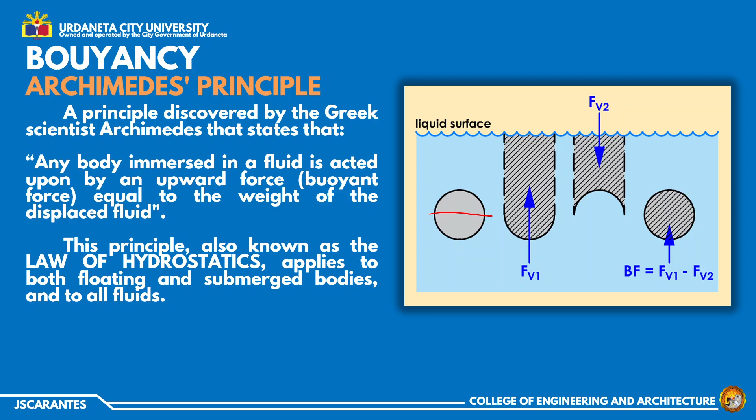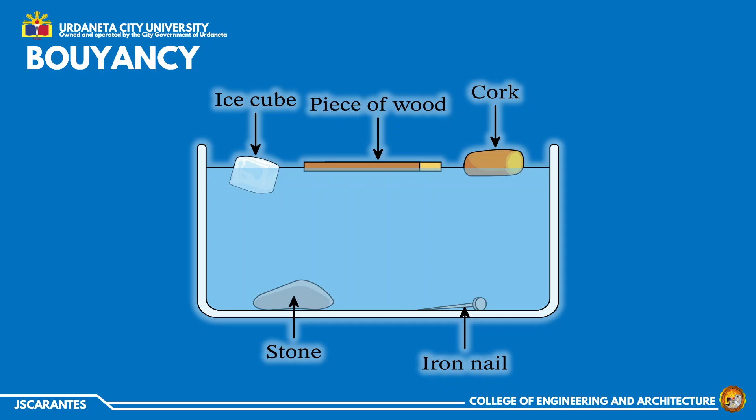So, yung reason to explain that is actually related dun sa buoyancy, specifically dun sa tinatawag nating buoyant force. According to Archimedes, any body na nakasubmerge or immerse in a fluid ay may nag-a-act na upward force na tinatawag nating buoyant force.

For example, considering an object na nakalubog or floating in a fluid or a liquid, take note, it can be liquid, can be fluid din. General lang kasi yung term na fluid since it also includes yung mga gases natin. Pag liquid lang kasi, liquid. Pero pag sinabi nating fluid, it is both the gases and liquid. So, anything that flows.

Sa isang object that is floating, let's say in the liquid na lang, since ito yung nasa figure natin, syempre yung object na yun, meron siyang weight. So, yun yung W. At sabi ni Archimedes, merong buoyant force na nag-act sa kanya if ever na that body is immersed in a fluid.

Imagine niyo na lang, for example, you have a glass of water, punong-puno yung glass. At, what will happen if you put ice on that glass? Siyempre, merong matatapong mga tubig. Yung matatapong tubig na yun, actually, yun nire-refer natin dito as volume displaced or volume of body displacing or volume of water. Basically, kung doon sa baso ng tubig, yung natapong tubig, yun yung gaano karaming nawalang tubig from the glass of water.

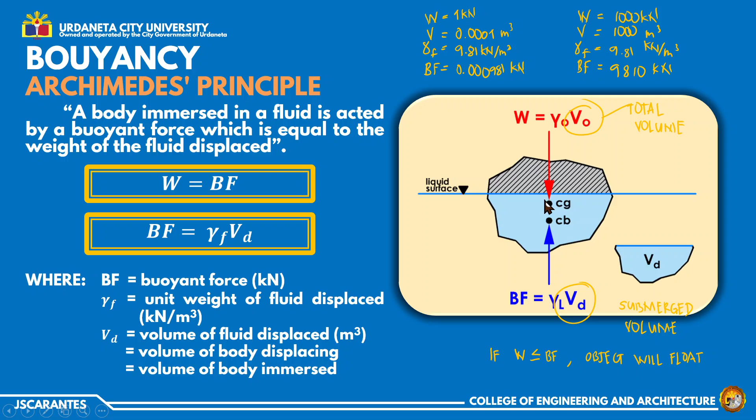So CG and CB are directly across from each other. We have additional formulas here. For a homogeneous body of volume V floating in a homogeneous fluid at rest, the volume displaced is equal to... this comes from the formula on the other side, from W equals BF. So we equate this W to BF.

So W is equal to BF. W is gamma of the object times volume of the object. The buoyant force is gamma of the fluid times volume displaced. Now, let's divide both sides by gamma of the fluid. This cancels out, leaving the volume submerged. So volume submerged equals gamma of the object times volume of the object, divided by gamma of the fluid. This is the same thing.

It's just a different version since the ratio of gamma can also be expressed in terms of the ratio of specific gravity, or if you want, in terms of density, rho of the object divided by rho of the fluid. It's just a ratio. Since rho, or gamma, is rho times g, the formula above becomes rho times g of the object divided by rho times g of the fluid. The g's are the same, referring to acceleration due to gravity, so they cancel.

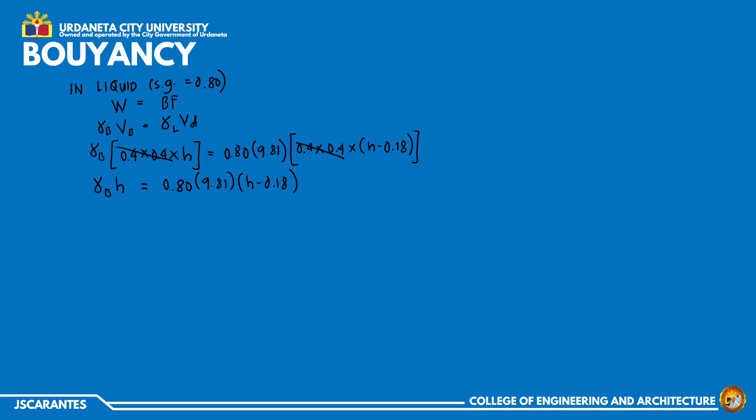Pero considering this equation, so na-produce natin, so meron tayong dalawang equation. So merong dalawang unknown, merong dalawang equation. Basically, we have two equations, two unknowns dito, no? Pero para mas madali ma-compute yung values ng mga unknowns na yon. So eto, siguro pangalanan na lang natin dito sa kabila.

So this is, say, equation 1. While this one, pangalanan natin equation 2. So kung papansinin natin yung ating dalawang equation, eto, equation siya ng gamma block times height. And actually ganun din dito sa kabila. This is gamma ng block times height. So parehas silang gamma block times height. So magkaiba lang yun din dito sa right side ng mga equations nila.

So para ma-solve natin yung isang unknown, ang pwede natin gawin is to equate equation 1 and equation 2. So bakit natin equate? Kasi parehas silang gamma b times height. So ito rin, gamma b times height.

So, gamma ng block times height is equal to... equal lang din yan. Kumbaga magkaibang expression lang. So, ito, expression doon kay water. Ito naman, expression or equation para siya kay liquid.

So, kanina, doon sa equation 1 natin, that is 9.81 times h minus 0.2. Palitan lang natin. Ang gamma ng block times height ni water, 9.81 times h minus 0.2. While para kay liquid, ang kanyang gamma b times height ay 0.8 times 9.81 times h minus 0.18. Pwede natin isolve dito si h, no? Pero para mas madali yung equation, actually, pwede na rin naman i-cancel si 9.81 kasi present yan kabilaan. So, matitira na lang, we have h minus 0.2 equal siya to 0.8 times h minus 0.18.

So, it's up to you paano nyo isosolve ito. You can use shift solve or use algebraic manipulation. Kayo nang bahala paano nyo isosolve ito, no? So, pag na-input nyo sa calc yan, so the value of h will be 0.28 meters. So, ito na yung answer natin for part A. Yan yung total height ng ating object, ng ating block.

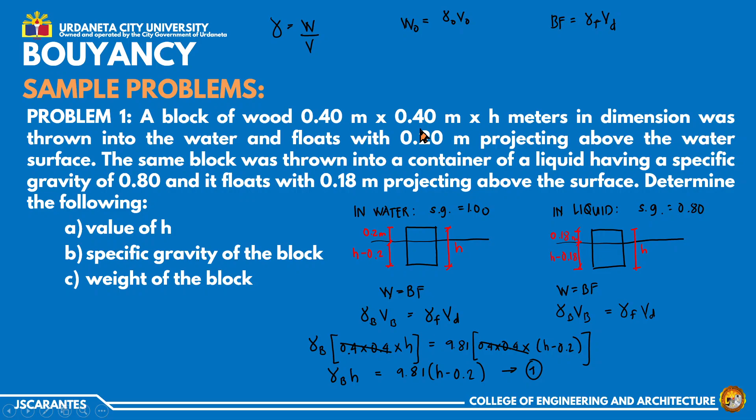So makukuha natin si weight is equal to gamma times the volume. Ang tinatanong is the weight ng block. Kung weight ng block ito, syempre gagamitin mo gamma ng block kung ano material siya gawa, and then total volume din ng block. Dito meron na tayong value ng gamma ng block, yun yung 2.803 kanina. And then si volume ng block, pwede rin natin siya makompute.

Kasi binigay naman sa problem yung cross-sectional area niya, tapos na-compute na natin yung kanyang height, which is 0.28. So ang gamma ng block is 2.803 kilonewton per cubic meter. At ang kanyang volume ay cross-sectional area niya, 0.4 meters by 0.4 meters, by na-compute nating h kanina, 0.28. So ito, unit niya ng volume, 3 meter, cubic meter. Magka-cancel na ito, ang matitira is nakakilonewtons.

So for the weight ng block, we have 2.803 times 0.4 squared times 0.28. You have 0.126 kilonewtons. So this is the answer for part C of problem number 1.

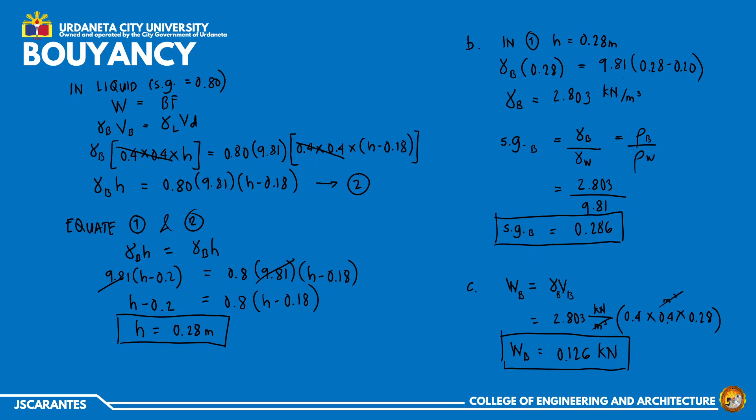I hope nasundan mo yung ating problem 1. Let's try another example. Dito naman sa problem 2, we have a block of wood, 0.2 meter thick, floating in seawater. Take note, laging babasahin saan nakalutang, hindi porket water, parehas na 9.81. Medyo madali ma-miss out kasi ito pag binanggit sa seawater, salt water, so be careful of that. The specific gravity of the wood is 0.65, at tinatanong, find the minimum area of block which will support a man weighing 80 kilograms.

Dito, parang kabaliktaran siya actually ng ating problem 1. Ang binigay kasi sa problem 1 is the cross-sectional area, tapos hinahanap yung height or yung pinaka-thickness ng block. Dito, ang binigay is yung thickness, tinatanong ano yung minimum area niya. So merong word dito na minimum.

Bakit merong minimum? Kasi dun sa block of wood na yun, sabihin natin 0.20 thick, parang siguro tabla, parang ganun yung dating niya. Merong sasakay kasing man doon weighing 80 kilograms, so syempre pag may sumakay, possible lumubog yung pinaka-block mo. So merong minimum na word dito kasi although it is not completely stated dito sa problem na to, pero pag mga ganito, minsan nire-refer din siya as in equilibrium.

Ang pinaka-figure natin, i-drawing ko na lang. For example, ito yung ating seawater surface, and then merong block of wood, say ganyan. At ang kanyang thickness daw ay, itong thickness niya, 0.2 meters. So originally, ganito sana yung itsura ng block natin.

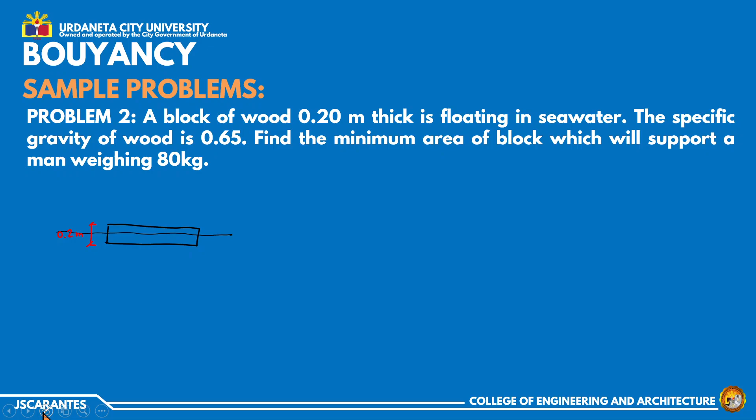Wait lang, medyo tagilid, ayusin ko lang konti. Mas lalo namang tagilid. Mahirap talaga maging straight dito kasi sa pen tab.

For example, ganyan. So originally, nung lumulutang pa lang yung block of wood, syempre merong part na nakasubmerge, merong part na nakaproject above the seawater surface. Dito, alam natin na nag-float siya kasi ang pwede natin gamitin pang check dyan. Tignan nyo yung specific gravity ng wood, 0.65 lang. Ano ba kasi yung specific gravity ng seawater? Di ba that is 1.03.

Sabi natin, one reason bakit lumulutang yung mga objects is dahil sa density nila. Kung mas malaki yung density, o mas maliit yung density ng object kaysa dun sa liquid, lulutang yung object natin. So for this case, 0.65 is less than the 1.03 na kay seawater, kaya lulutang at lulutang yung ating block of wood. Dito, sample natin, parang ganito yung itsura niya: merong part na nakasubmerge, merong part na nakaproject above the seawater surface.

Ngayon, ang mangyayari daw, merong sasakay na man weighing 80 kilograms. Pagsakay niya, let's say dito na lang sa baba. Hindi kasi binanggit yan sa problem, pero ang mga term na ginagamit pag mga ganitong klase, 'in equilibrium'. So when we say in equilibrium, ganito yung itsura niya, let's say merong stickman dito, hindi nakapatong, tagilid yung ulo niya.

Dalawa lang kasi yung meron dito sa ating object. Syempre, kapag in-equilibrium siya, kumbaga walang other external force, so weight tapos buoyant force lang ang nag-act sa kanya. Dalawa lang, yung isa downward - si weight kasi lagi naman yung downward. At si buoyant force, lagi rin siyang upward. Sila lang basically sa summation ng vertical forces. Upward is equals to downward, kaya W is equals to BF.

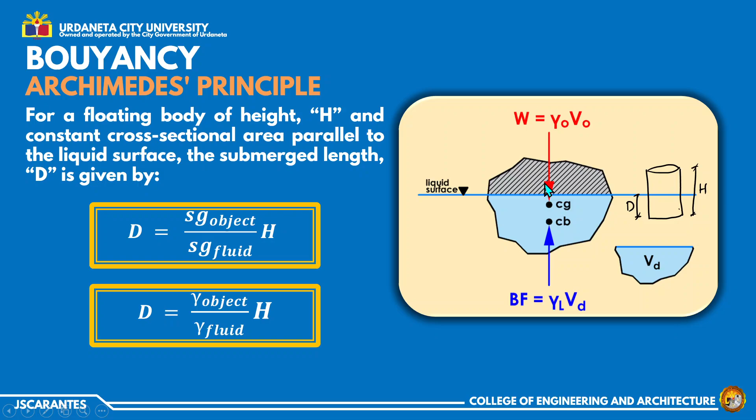Dito, ibig sabihin, yung W is equals to BF, pwede kasing dalawa yung weight na nag-act, pwede ring dalawa yung buoyant force. For example, dalawang object yung nakasubmerge, something like that. Etong W is equals to BF, para lang din siyang summation ng vertical forces - kumbaga eto yung lahat ng downward, eto naman yung lahat ng upward.

Meaning, merong mga cases na, dalawa yung weight, possible, or tatlo, o apat. Ganun din sa buoyant force, pwede rin siyang 2, 3, or 4. Depende dun sa ating problem. Pero kung i-analyze natin dito sa ating problem 2, ano ba yung mga weight na meron dun sa ating problem? Originally, syempre, merong weight yung block.

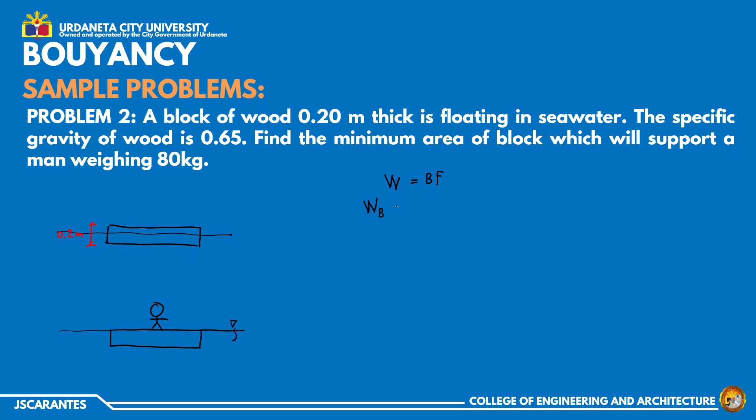Binidicate naman dyan, nagbigay ng mass, naka-kilogram, so mass pa lang yan. Pag merong mass, meron ding weight syempre. So considering the weight, dalawa yung present dito ngayon - merong weight si block, meron ding weight si man. So W sub M na lang.

Pero pagdating sa buoyant force, meron din bang buoyant force si man? Wala, kasi nakasakay siya dun sa block. Ang nakasubmerge lang is yung pinaka-block of wood natin. So ang meron lang buoyant force, si block - walang buoyant force si man kasi si man nakasakay sa block. Yun yung critical dito na kasi hindi completely stated sa problem, pero yun yung maging solution natin dito.

Ngayon, expand lang natin to mga to. Si gamma ng, or si weight ng block - take note, weight is equal to gamma times volume. Magsawa kayo sa formula na yun, yun talaga yung ginagamit dito. So weight is gamma - weight ng block, we have gamma ng block, volume ng block.

Pero dito sa weight ng man, hindi nyo na kailangan gamitin si gamma times volume kasi nagbigay na ng mass. So to convert mass to weight, ang formula natin for W is equal lang kay M times acceleration due to gravity. And then kay buoyant force, that is lagi naman itong gamma ng fluid times volume submerged.

Dito, papansin na, sabi natin completely submerged, kumbaga yung pinaka-top ng block is flush dun sa liquid surface natin. Ibig sabihin, completely submerged meaning yung ating volume ng block equal siya dun sa submerged volume. So eto, pwede nating palitan na lang din as volume ng block kasi completely submerged - equal si displaced volume kay total volume.

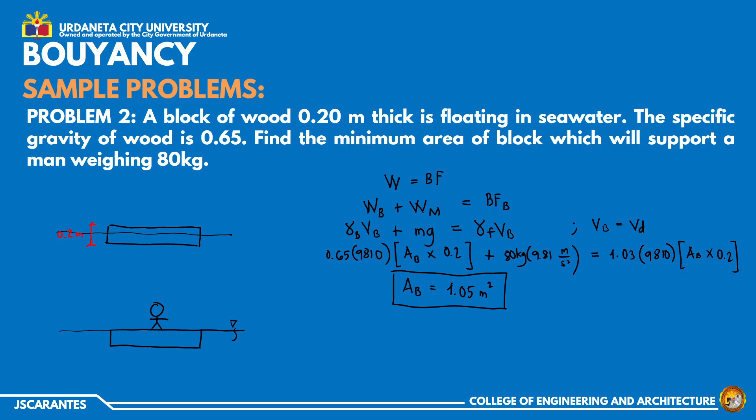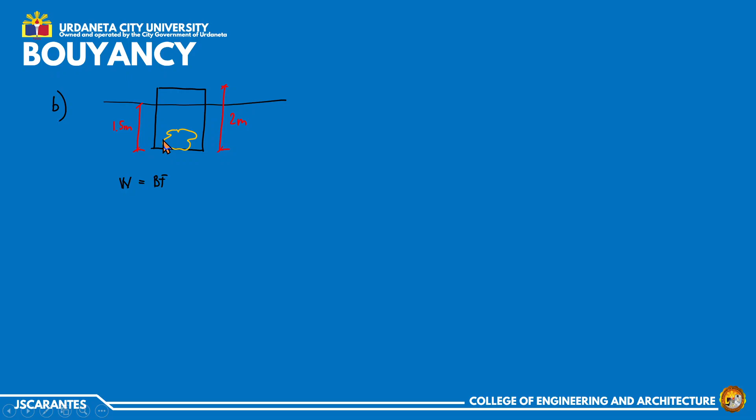So, summation pa rin tayo ng vertical forces sa lahat ng weight, equate mo sa lahat ng buoyant force. Dito, ang weight na meron is still the weight ng cylinder tapos weight ng lead. Ito yung binigay plus hanapin natin weight ng lead. Ang pinagkaiba lang sa solution natin sa part A, isa na lang kasi yung buoyant force na present dito - buoyant force na lang ni cylinder. Kasi nilagay mo sa loob si lead eh, kaya wala nang dinidisplace ng water si lead. Ang meron na lang is si cylinder. I hope na gets yun.

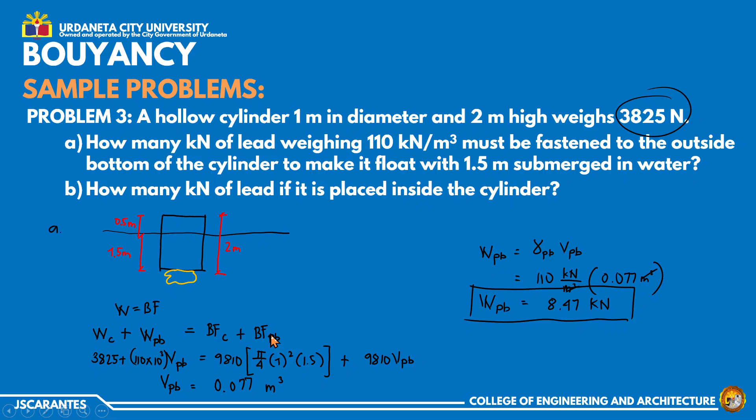So, pinaka-solution natin, parang ito rin siya. Tatanggalin nyo lang itong pangalawang term natin kay buoyant force kanina, and everything is the same na. So, this is 3825 plus 110 times 10 raised to 3 para maging newtons.

Multiply natin volume ni lead. Equate natin, buoyant force cylinder, we have 9810, 9810 volume submerged ni cylinder, pi over 4, times 1 squared times submerged depth na 1.5. So, tinanggal lang natin yung plus dito kanina.

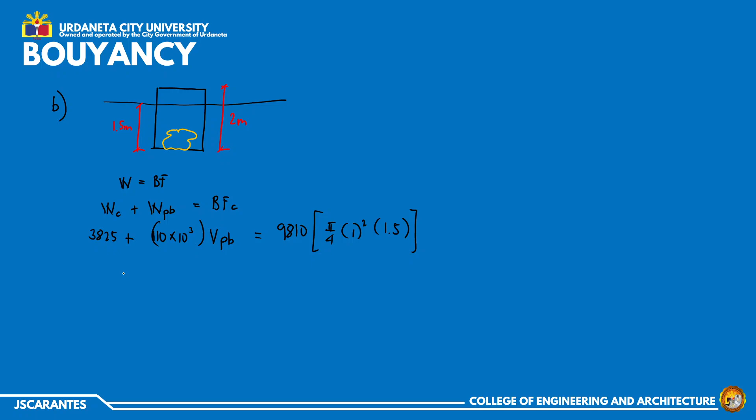So, to solve this, we have volume ng lead equal to... nabakwata yung sa calculator ko, kailangan kong i-type ulit. (9810) pi over 4 times 1 squared times 1.5. Shift solve. So, we have 0... or kahit hindi na pala, i-shift solve, pwede palang rekta. Pero ito ang volume nito, para lang same yung solution natin, 0.070

cubic meter. And then, for the weight ng lead, equal ito kay gamma niya. So, ang gamma niya is 110 times 10 raised to 3 times 0.070. Pero pwede rin pala na ito, ito na mismo yung hinahanap kasi na naka-kilonewtons.

Pero ang gawin nyo na lang, i-convert nyo ng kilonewton. So, gawin nyo 3.825, ito naman gawin nyo 9.81. Or pwede rin ganyan mismo, 110 times 10 raised to 3 yung gamitin. I-multiply natin ito - so 110 times, or wait lang, naka-kilonewton pala. Tanggalin natin itong si 100 or times 10 raised to 3. So, 110 lang times 0.070 kasi naka-kilonewton yung hinahanap.

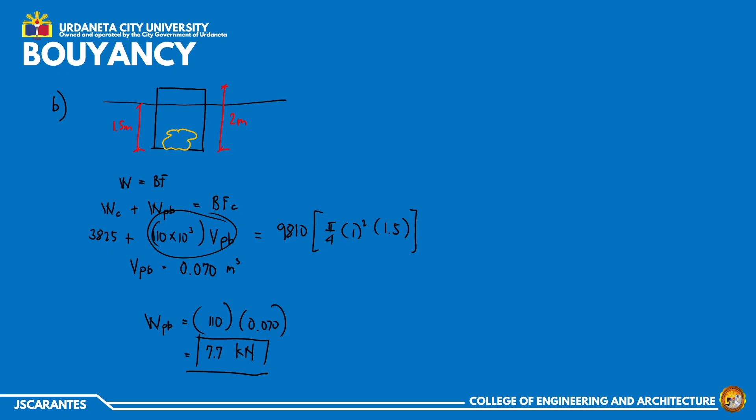So, yun yung ating problem number 3. For problem number 4 naman, we have two spheres, each 1.2 meter in diameter, are connected by means of a short rope. One weighing 4 kilonewton, the other weighs 12 kilonewton when placed in water. Tinatanong tension in the rope, volume of the spheres exposed above the water surface, and then the height of the segment above the water surface.

So, dito, kumbaga, kailangan kasi nating, hindi naman assume, kailangan nating i-check. So, merong dalawang sphere daw - hindi naman natin alam, initially, kung yung dalawang sphere ba na yan, lulubog parehas, lulutang parehas, or lulubog yung isa, lulutang yung isa. Para ma-check natin paano yung magiging drawing sa figure, kailangan nating i-determine if ever na alin man sa dalawang ito ang lulubog or kung parehas man silang lulubog. So, something like that.

And to do that, parang yung ginawa natin kanina, so we need to compute for the, or compare natin si weight and then the possible buoyant force na pwede nilang i-produce. For example, considering the sphere na merong weight na 4 kilonewtons, then dito naman, considering the weight na 12 kilonewtons. Ang buoyant force nila na mapoproduce, kung isasubmerge mo sila completely, ay parehas lang kasi magkaparehas sila ng size. Ang magkaiba lang is yung weight nila, so possible siguro maggawa sa magkaibang material - yung isang material mas dense, yung isa mas magaan. So ganon, kaya magkaiba yung kanilang weight.

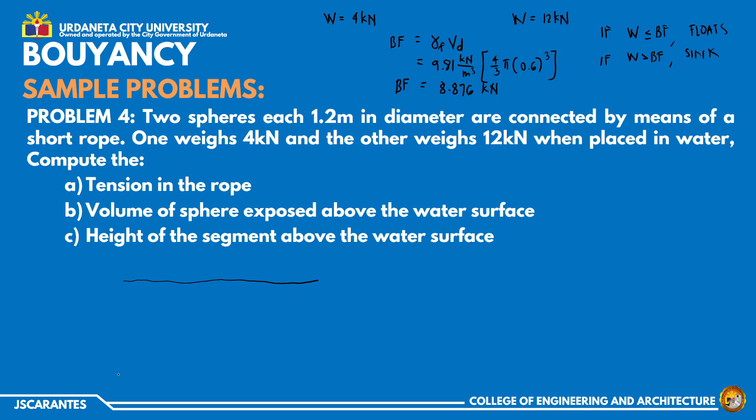So pwede na tayong mag-drawing ng figure ngayon. Itong figure na to, hindi lang basta in-assume, na yung isa. Napakita naman natin dyan na based on sa comparison ng weight and buoyant force, yung isa talaga ay lulubog, yung isa is lulutang. Yung lulutang na yon, yung 4 kilonewton. Balik tayo dito. Ang buoyant force na ma-produce niya, 8.876. Etong buoyant force na to na 8.876, ito yung mapuproduce kapag sinubmerge natin completely.

Pero ang kailangan mo lang kasi para mabalance siya, just to float, just to make an object float, dapat lang sakto-sakto yung weight dapat equal to buoyant force. Pero dito sobra-sobra yung buoyant force. Meaning, hindi natin kailangan gamitin yung total volume niya. Hindi natin kailangan i-completely submerge para ma-support siya. So as long as equal yung value ng buoyant force and weight, pwede na siyang mag-float.

Ibig sabihin, so parang bottom line lang doon, sobrang laki ng 8.876 para i-support na yung 4 kilonewton. Ibig sabihin, hindi natin kailangan i-completely submerge yung ating 4 kilonewton na block. Kumbaga let's say, merong part na nakalubog, merong part na naka-expose above the water surface. Parang ganun yung gusto kong i-point out doon. Let's say parang ganyan yung itsura ng 4 kilonewton na block natin. At saka syempre, yung 12 kilonewton, lumubog. Wait lang, lakihan lang natin kasi parehas lang dapat sila ng size.

Hirap naman mag-drawing dito. Yan, okay na siguro yan.

Yung dalawang sphere daw na yan is connected by means of a short rope. So merong rope na nagko-connect sa kanila. Hindi binanggit o hindi nagbigay ng any information about the rope. Pero in fact, kahit gaano man kaliit yung cross-sectional area ng rope, supposed to meron pa rin siyang madi-displace na water. Pero wala namang binanggit dito, kaya hindi natin i-consider yung displaced volume ni rope.

Para i-solve natin yan, magkakaroon tayo ng free body diagram. Una, consider muna natin yung nasa baba, yung ating 12 kilonewton na block, kasi mas konti yung unknown doon. Alam natin yung weight niya, 12 kilonewton, at pwede na rin natin makompute yung buoyant force niya. Ang unknown na lang, pag inuna natin yung FBD ng 12 kilonewton, yung value ng tension dun sa rope - yun lang yung unknown.

Pero pag dito tayo nag-start kay 4 kilonewton, ang unknown dyan, di natin alam ano yung volume submerged, tapos meron pang value ng tension - dalawa yung unknown natin. So mas marami siya, hindi natin siya makukompletong solve pag dito tayo nag-start. Kaya uunahin natin yung 12 kilonewton.

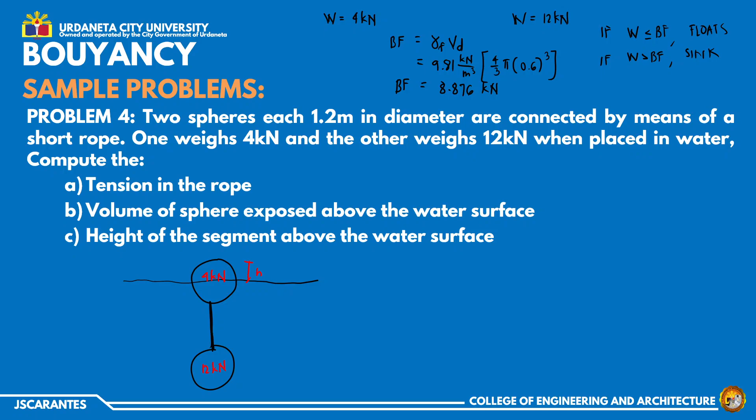Considering 12 kilonewton block, drawing ko lang, let's say ito siya. Merong weight, syempre ang weight niya is 12 kilonewton. At meron ding buoyant force na nag-act sa kanya, si buoyant force ay laging pataas. Itong buoyant force na to, ito yung gamma ng fluid times submerged volume, na kinumpute na natin kanina nung nag-check tayo. Kukunin ko na lang yun dito.

8.876 kilonewtons. Ngayon, paano naman yung direction ng tension mula dun sa rope? Si rope nandun sa bandang taas ng 12 kilonewton. Pag sinabi nating tension, laging away from the body - so kung ito yung body ng ating 12 kilonewton na sphere, ang tension laging away from the body, so ito yung ating tension.

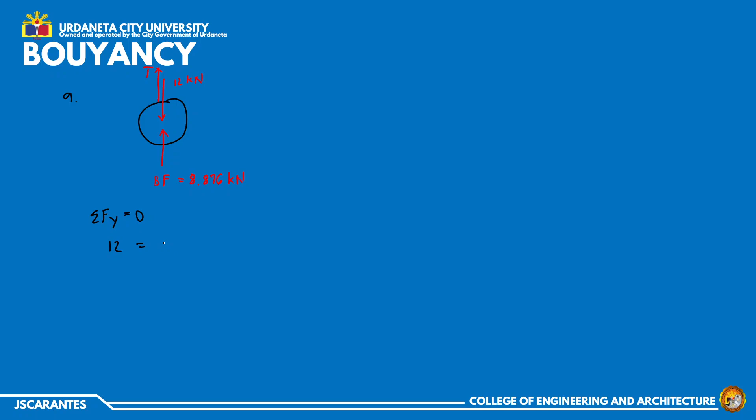Kung magkakaroon tayo ng summation of forces, magsa-summation ng vertical forces tayo is equal to 0. Lahat ng downward, equate mo sa lahat ng upward. Ang downward natin ay si 12 kilonewton, ang upward natin si buoyant force plus yung tension dun sa rope. Lagay natin, value ng W is 12, value ng buoyant force 8.876 plus tension. Pwede natin ma-compute the value ng tension - that's 12 minus 8.876, we have 3.124.

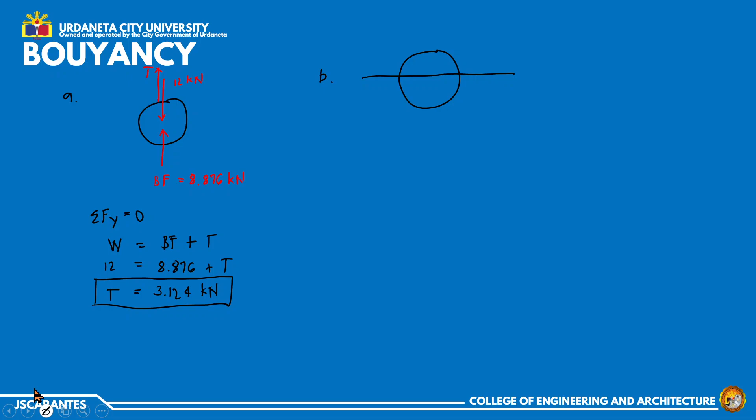3.124 kilonewtons - ito na yung answer natin for part A. For part B naman, ang tinatanong volume nung sphere exposed above the water surface, pupunta naman tayo dun sa FBD ni 4 kilonewton na sphere. Ang FBD niya, let's say ito yung water surface, ito yung sphere natin, medyo nilakihan ko na lang. Meron siyang weight na 4 kilonewtons, meron siyang buoyant force na.

So hindi pa natin alam, compute natin si buoyant force muna. Hindi ito yung 8.876, kasi yung 8.876 ay kapag completely submerged yung sphere, yan yung value ng buoyant force nila. Pero dito, hindi kasi completely submerged si 4 kilonewton, kaya hindi natin alam for sure ilan yung value ng volume submerged niya. Kaya hindi natin pwedeng gamitin yung total volume.

Aside from the weight and buoyant force, meron ding tension. Nakakabit yung rope dito sa bandang baba nung 4 kilonewton na block. Ang tension laging away from the body, so ganito yung direction ng tension, pababa. So magsasummation tayo ng vertical forces.

Summation ng F of Y is equal to 0. Sa lahat ng downward, weight plus tension is equal to lahat ng upward buoyant force. Ang weight niya, 4 kilonewton. Ang tension na compute natin kanina, 3.124. Ang buoyant force ng ating 4 kN na block na sphere ay 7.124 kilonewtons. So pwede nating mahanap ano yung volume submerged.

Di ba ang formula natin buoyant force ay gamma ng fluid times volume displaced. Equate natin to, gamma ng fluid, ang fluid dito ay water, times volume submerged. Ang hinahanap sa B kasi is the volume exposed, pero madali na lang kunin yun, kasi pwede nating express si volume exposed or projected above the water surface. Kunin lang natin ano yung total, tapos susubtract natin ano yung submerged volume. So compute muna natin si submerged volume.

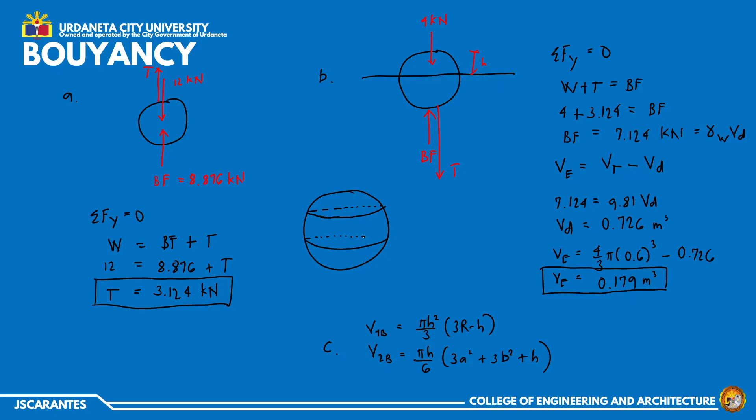So ano yung spherical segment? Try ko na lang mag-drawing dito. Meron pa namang space, for example, considering the top... pasensya na lang yung drawing ko, hindi siya perfect sphere.

Let's say dito, meron tayong dalawang segment. Yung segment na tinutukoy natin for one base, ito yung nasa taas. Kapag kinat mo yung sphere mo, tapos kinonsider mo itong nasa taas na part, ito yung segment na tinutukoy ko. Isa lang yung base niya kasi isa lang yung cutting plane niya. Pag kinakat natin yung sphere, syempre, yung cutting plane niya is circle, kasi nga sphere siya. Dito, para makompute yung volume ng spherical segment with one base, ito yung formula ng volume niya.

Pero yung two base naman, ang tinutukoy natin dyan, etong spherical segment na ito. Dalawa yung base niya kasi dalawa yung cutting plane niya, parehas na circle. Basically, yung A dito and B, yun yung radius ng mga cutting plane.

For example, palit ako ng kulay. Etong base na to, ang radius niya is A, tapos yung base na to, ang radius niya is B. Tapos ang tinutukoy natin, let's say, ito yung center ng ating sphere, so yung radius ng buong sphere natin, yun yung R dyan. Considering spherical one base, ang H niya ito. Pero spherical ng two base, ito naman yung kanyang height. So yung mga formula ng dalawang spherical segment na yun, ito siya.

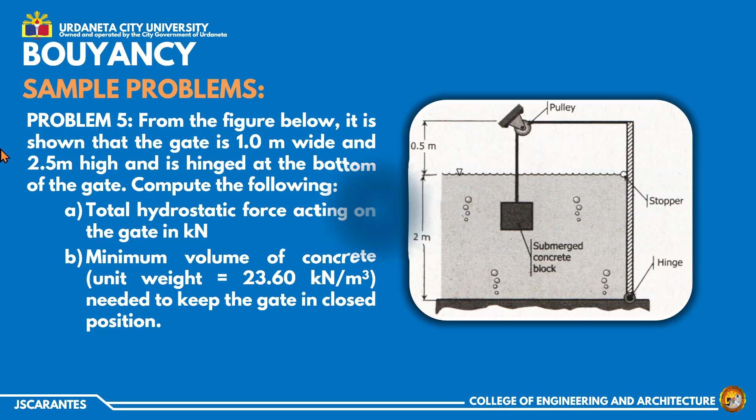23.6, 5.232 plus 9.81. Shift solve. So volume of block we have 0.379 cubic meter. Actually, this is our answer for problem number 5.

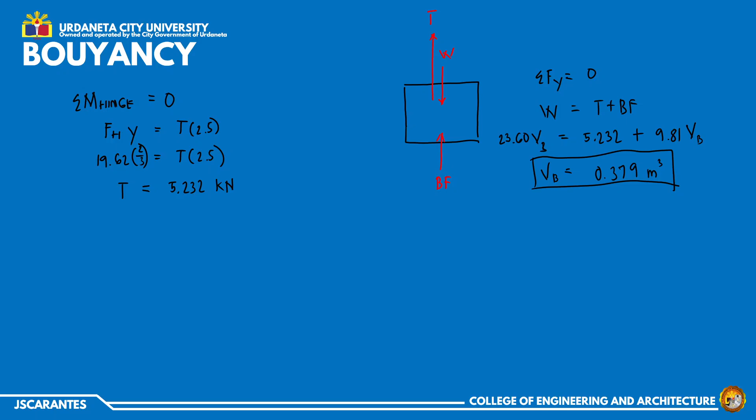So for our next topic, we have stability of floating bodies. But let me cut the video here, and I'll start a new video for the stability of floating bodies.